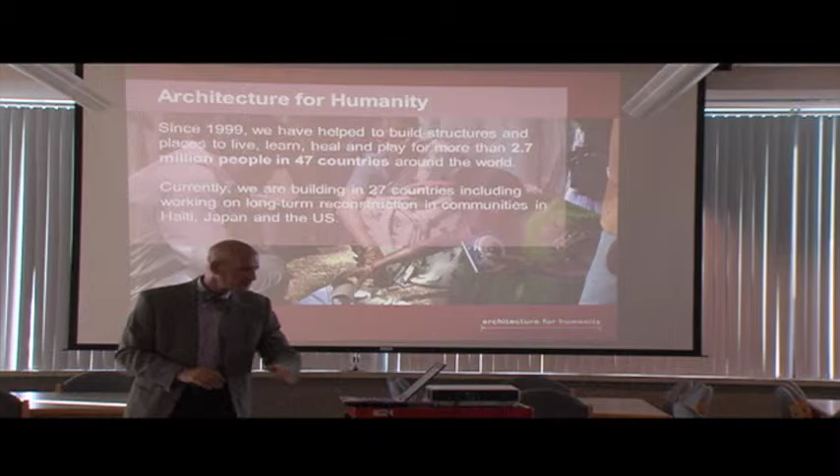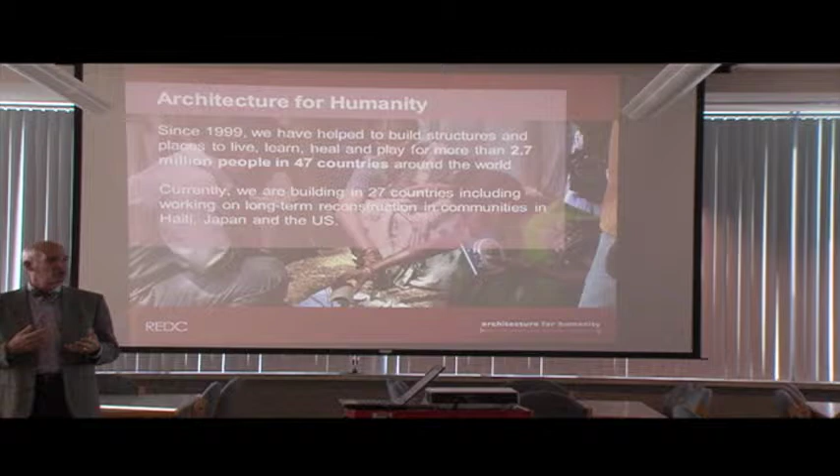A little about Architecture for Humanity: we are a 15-year-young organization using the power of design to better lives globally. Our network of field offices ranges from our headquarters in San Francisco to New York, Haiti, Bogota, Johannesburg, and Tokyo, and we have 56 chapters worldwide. The closest one is our friends in Newark - thank you, Tom, for joining us. We have a chapter in New York, one of our largest, a chapter in Philadelphia, and about 18 here in the United States, maybe a bit more. The rest are global: Europe, Asia, Africa, and so on.

One of our partners in this process is the Ocean County Long-Term Recovery Group. I'll invite Peter up here to talk a little about their organization. Peter?

Hi, my name is Pete Crawford. I'm from the Ocean County Long-Term Recovery Group, the Assistant Disaster Case Manager Coordinator. I wanted to come here today to speak about the process - what the DCMs, or Disaster Case Managers, do to help people get their unmet needs fulfilled in recovery from the storm.

The biggest part of our process is vetting. Once someone's been assigned a Disaster Case Manager, we go through a checklist and ask people for copies of personal information to ensure they're sustainable, that it's their primary home, and they were affected by Sandy. We do an initial assessment, like an application during an intake meeting, gathering information about where they were during the storm, what they've done so far, what they received from insurance companies and grants, to paint a picture of their unmet needs so we can come up with a disaster recovery plan.

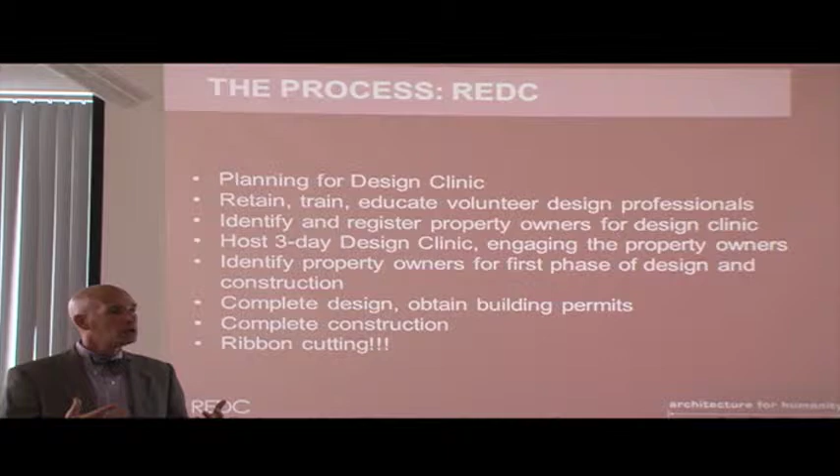We're in the process of gaining funding for future construction projects, and hopefully that'll be coming in not too short a while. Construction and obviously the ribbon cutting, which I think we talked about with our partners. People are going to be coming with little gift baskets and that's the event.

So what are we going to really be gaining out of this in terms of community goals? Well, it's to elevate the knowledge really of not just the homeowners, but of you folks to design smartly, and we'll get into what that means in a little bit.

The program goal is to serve a vulnerable population, seniors, disabled, veterans, low-income, single-income families, provide a means for those wanting to help with the recovery efforts to do so, develop a needs case, identify the most prominent recovery design issues for that particular neighborhood, and develop innovative design solutions.

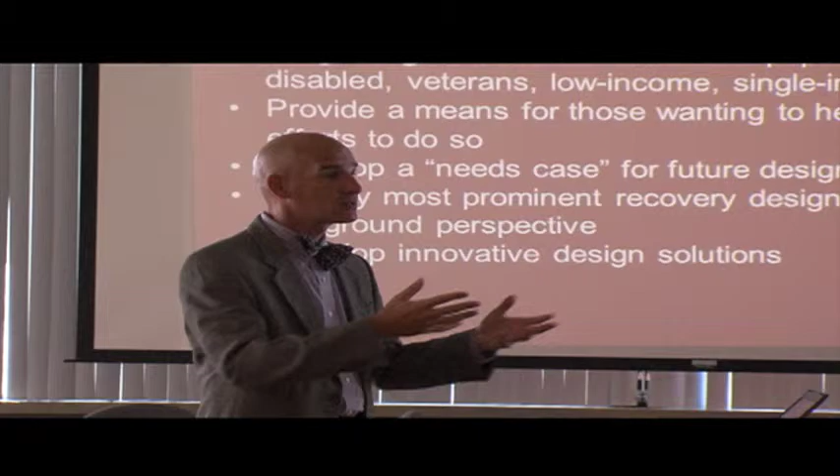So that's really where you guys and gals come in, the innovative design solutions. You're really going to be able to flex those design muscles in providing interesting and innovative design solutions for the community of Seaside Heights. And there's going to be a variety. Some, most I think, will be single-story bungalows, and there will be some multi-story facilities.

I know that OCLTRG has reached out to one of their colleagues at FEMA for the commercial side of it, so we may see some commercial clients coming in. It'll be an interesting pool of information.

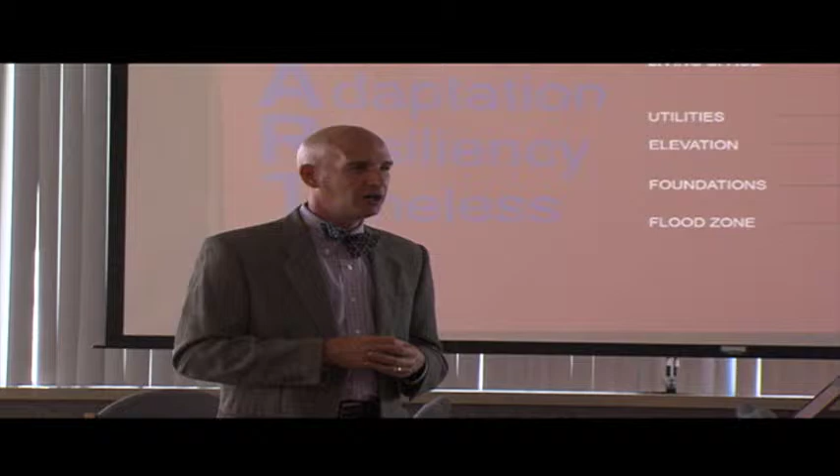So what does smart design mean? It's sustainable, it's mitigation, it's adaptation, it's resiliency, and it's timeless. A lot of people in our profession struggle with what sustainability means in terms of green buildings, and even more have a tough time identifying what resilience means. So at the end of the day, it really means designing a building smart.

Along with this, we want to talk a little bit about climate change, because it's not just about a storm right here, right now, but planning for the future. It's that timeless piece. We want to make sure that the buildings we are solving problems for are generational. It's not just a 5 or 10 year fix, it's a 40 or 50 year fix.

You hear people talking about climate change, sea level rise, and how do we deal with that? It's not just maybe 1 foot of freeboard, but it might be 2 or 3 feet of freeboard. We'll get into what freeboard means in a little bit.

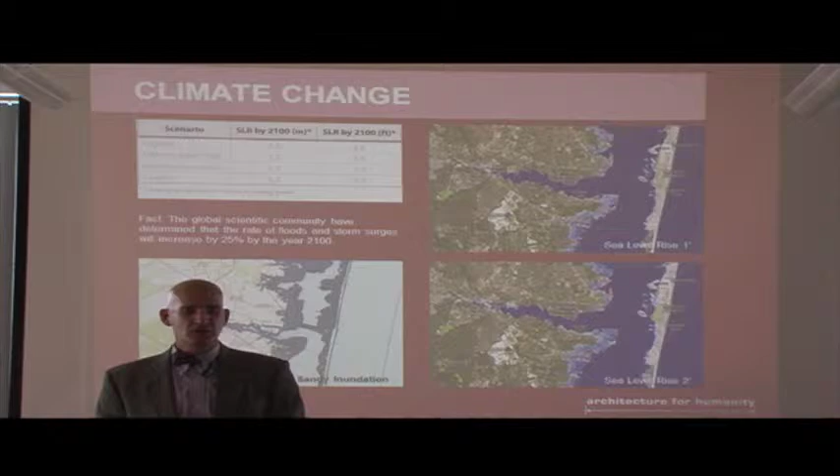The images on the screen right now, the lower left-hand one was the Sandy inundation of this particular region. Everything in blue was inundated by the storm surge from Sandy, and it goes in pretty far.

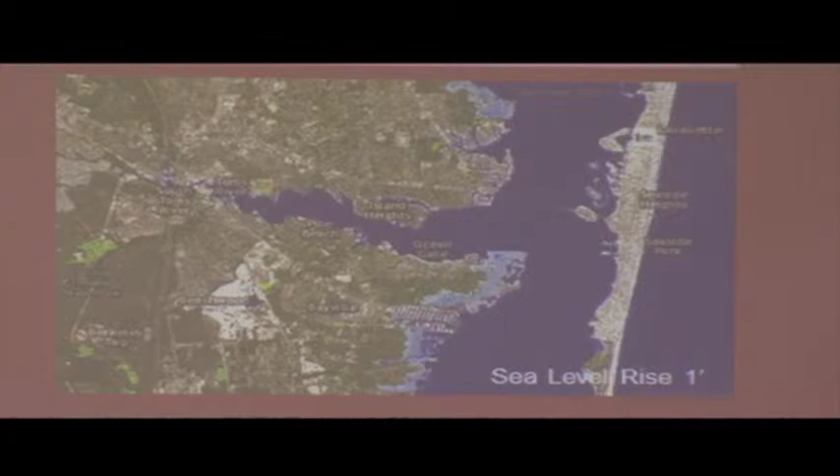If you look at the upper right with 1 foot of sea level rise, you can see the blue area is the effect. The lower right with 2 feet of sea level rise is an even greater effect. So how do we deal with that with our design solutions? That's something I challenge you folks to think about when talking to the clients and the design firm.

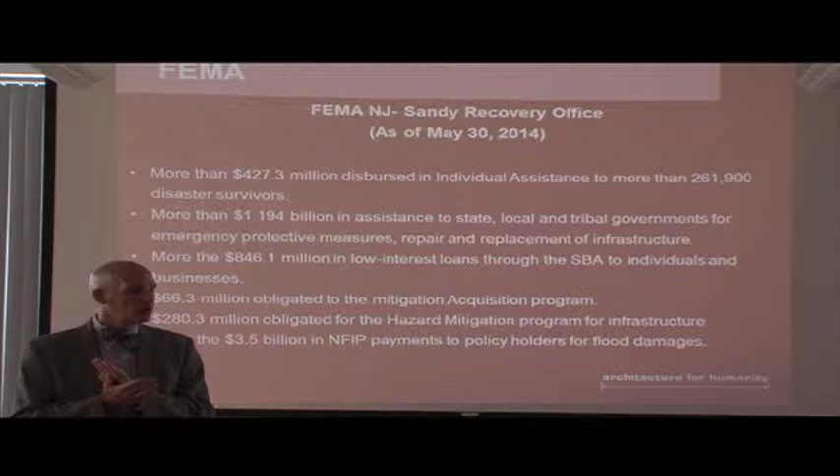Almost $1.2 billion in assistance to state and local governments. Another 280 million towards the hazard mitigation program for infrastructure. And we're not done by any stretch of the imagination. NFIP is the National Flood Insurance Program.

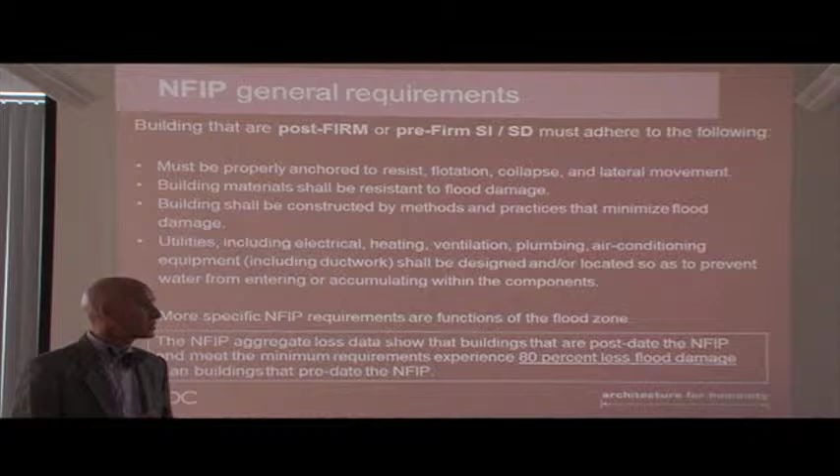One of the things we are going to be requesting, if not necessarily requiring - I think we're going to have a long conversation with our partners about the projects we take on - is if you build a residence, we reconstruct it, we're going to ask that you are sustainable and provide yourself with flood insurance. We don't want to have to come back a year, 2, 3, 5 years from now and worry about a project we've taken on that doesn't have any insurance. We want to make sure the building is sustainable, that the client can afford flood insurance and afford their building.

Just some quick facts about how the NFIP treated Sandy: authorized payments right away up to $30,000 for initial building repairs - think rapid repair program in New York City. A lot of that $30,000 went to roof repair, window and door replacement, infrastructure, boiler, water heater, and electrical upgrades.

I think, if I'm not mistaken, New Jersey just closed on the 1 year - Ken, correct me if I'm wrong. New Jersey closed the door on submission for that first year not too long ago. They basically closed everything now. I don't think there's any other grant right now. Correct, unless they change it and then reopen. Correct, thank you.

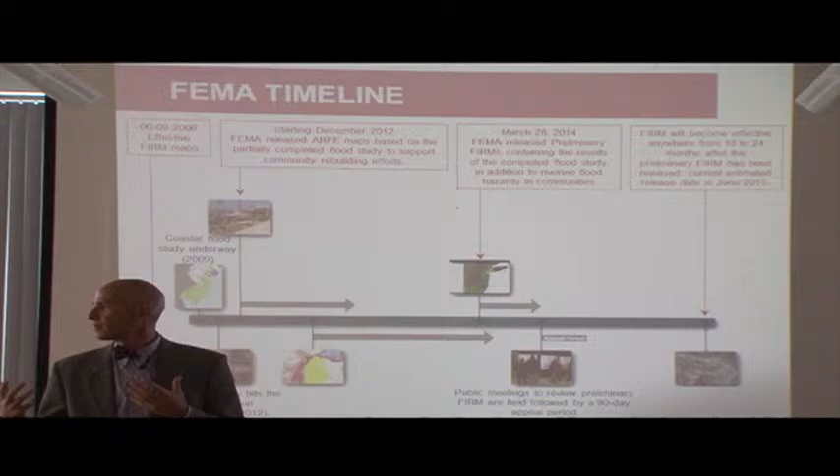So FEMA timeline on some firm maps. FIRM is how NFIP rates properties within a flood zone. The last preliminary flood insurance rate map was issued in March of 2014, so a few months ago, and they're looking at closing the door on that and making them final and official around this time next year.

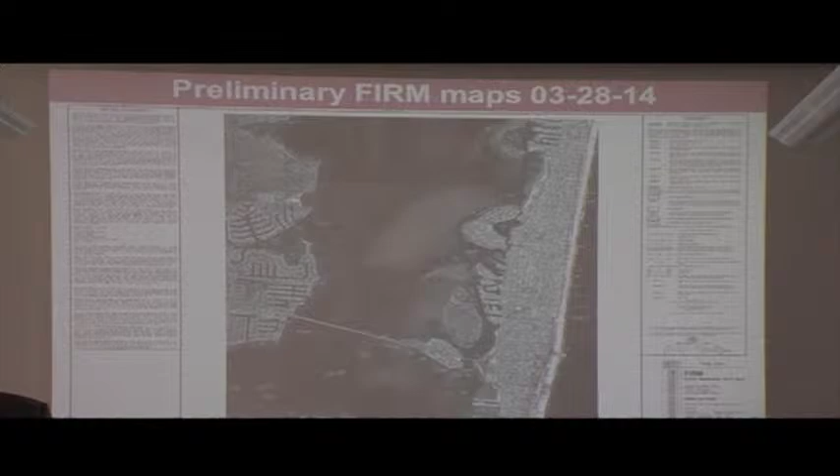And this is what a preliminary firm map looks like. You can find this on Region 2 Coastal through FEMA. Might be a little tough to see in the slide, but this is Seaside Heights, Seaside Park, and Lavallette to the north, with Route 37 Causeway cutting through the middle of that slide.

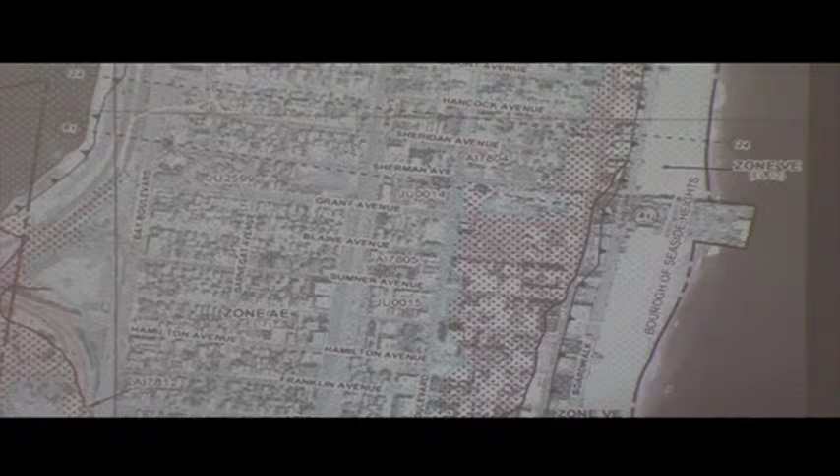Close up, Seaside Heights is broken up into a few zones. V is right along the beach, then X, then AE, which is predominantly in the middle, and then another X zone right by the Route 37 interchange.

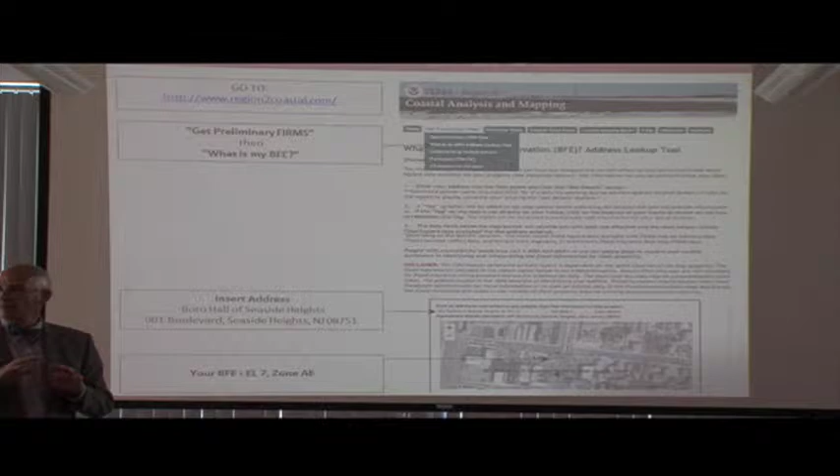So how do you find your BFE? You go to the region2coastal.com website, and click Get Preliminary Firm, a drop-down menu. Just a sidebar, all of this will be available to you at the design clinic. Each team will have a laptop with access to all of this information. Make it nice and simple.

So a client comes up to you and says, I don't know what my BFE is. You can plug in their address. In this case, we plugged in Borough Hall at Seaside Heights, and up comes the information. At the bottom, the BFE is elevation 7, zone AE.

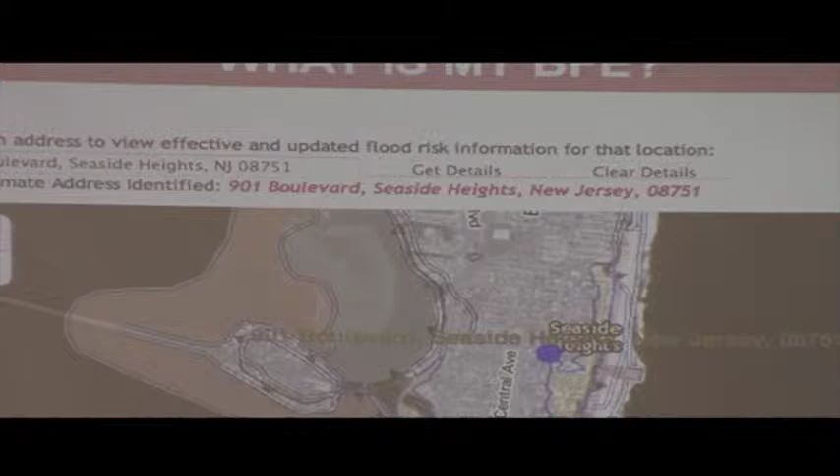So you can go through and get further details. This is a little bit more of a detailed map of the various areas.

Again, firm maps are broken into a number of areas. V, which is tidal, usually right on the ocean. Coastal Zone A, a little bit more inboard. AE, farther in, and then X is limited.

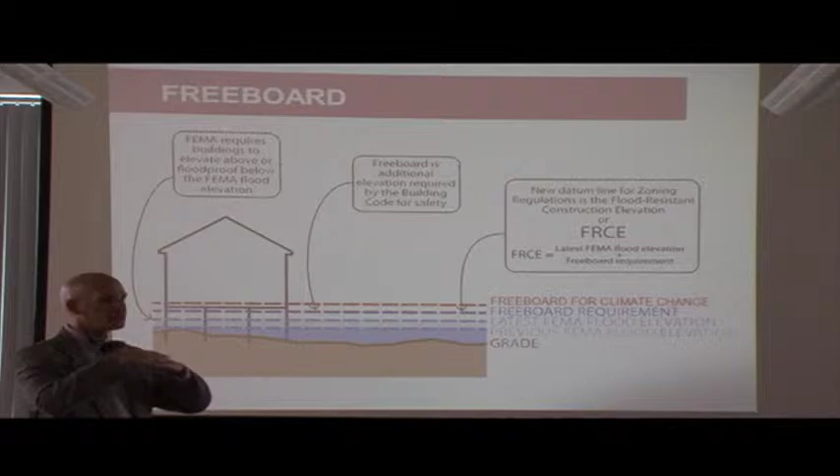So we talked a little bit about freeboard. That freeboard area is, you have a base flood elevation, which is what is recommended for your bottom living area. And then you have a design flood elevation, which is usually base flood plus your freeboard. Sometimes it's 1 foot, sometimes it's 3 feet. In Seaside Heights, it's recommended as 1, although with climate change we are recommending anywhere from 3 to 5, depending on the neighborhood.

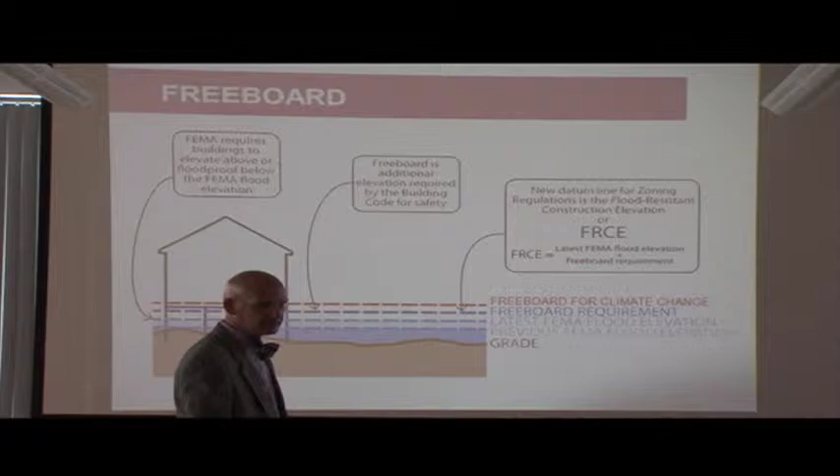Just a couple of glossary items. The National Flood Insurance Program, NFIP, talked about the special flood hazard areas, again V, A, AE, and X. We talked a little bit about base flood elevation, design flood elevation, and that term freeboard.

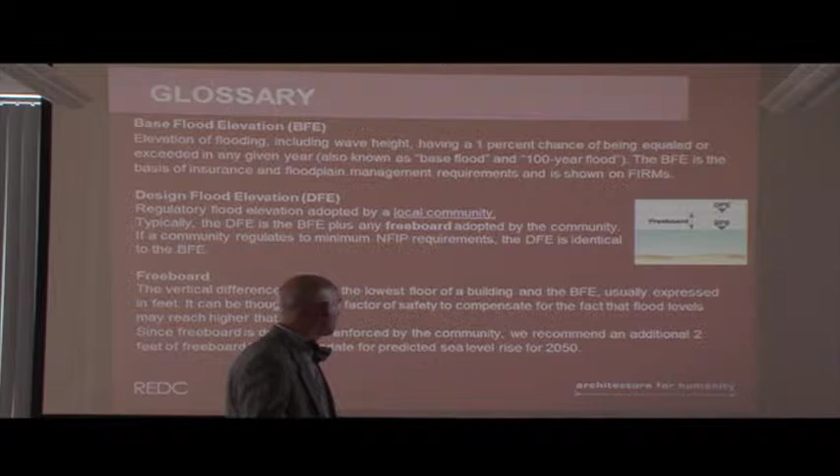Again, at the bottom, right now we're recommending an additional 2 feet. So it's 1 foot right now, plus an additional 2 feet within Seaside Heights, which would be 3 feet in total, to accommodate predicted sea level rises for 2050, which is still all within our generation.

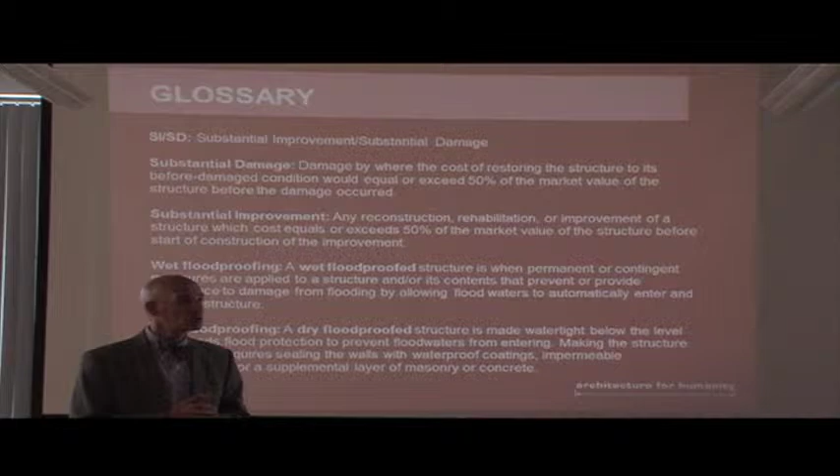SISD, substantial improvement, substantial damage. Anything north of 50% damaged of a building would be considered substantial damage, which means you need to make a substantial improvement, which means you need to follow the current New Jersey State Building Code. Anything less than 50% is considered a rehabilitation, although we are encouraging even those property owners with less than substantial damage to take serious consideration of the current building code.

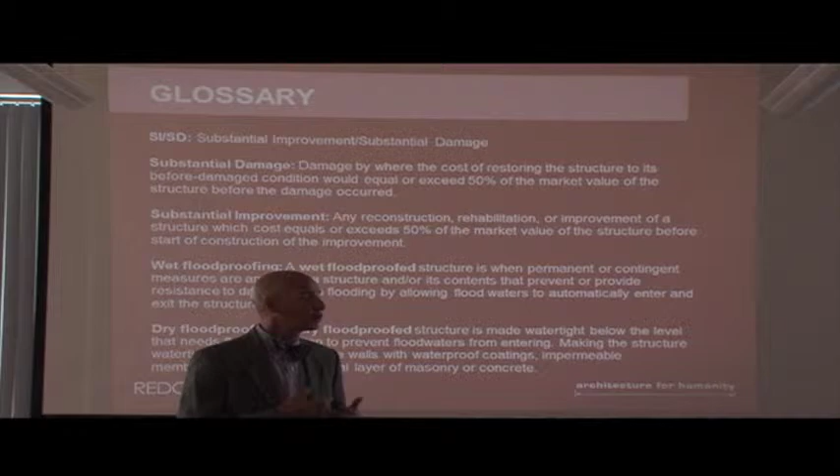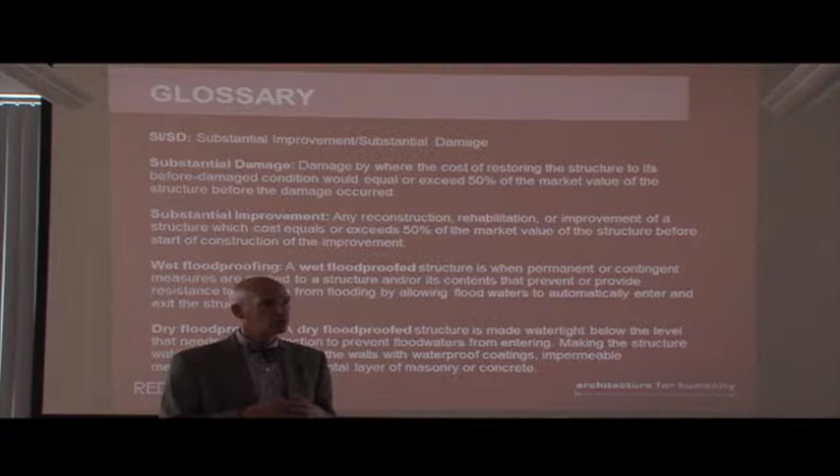Wet floodproofing and dry floodproofing are two pretty important terms to understand. Wet floodproofing is predominantly used for residential structures, which allows floodwaters to pass underneath or through the building, and we'll get into a couple of diagrams of what that looks like. Dry floodproofing is kind of the opposite, it prevents water from getting into the building. We'll get into some slides about that. Dry floodproofing is predominantly used for commercial or mixed-use structures, and I'll explain why.

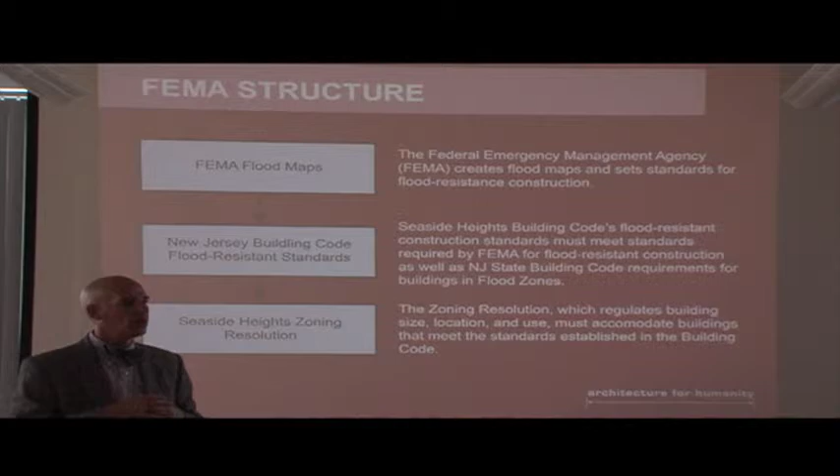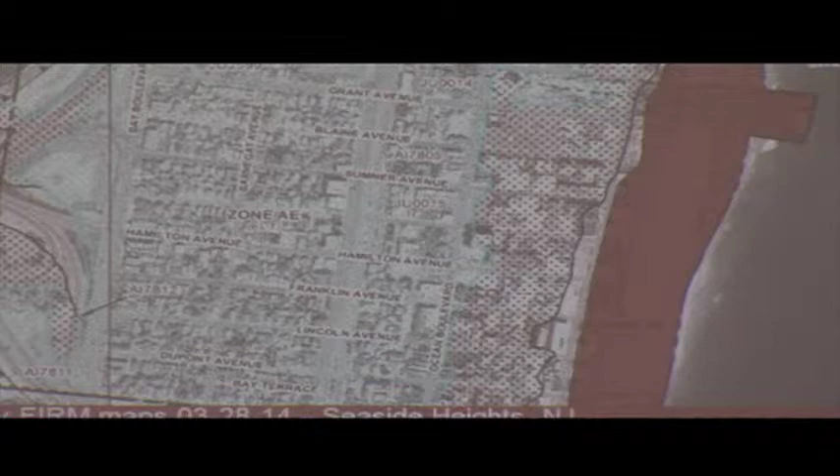So, Seaside Heights Zone V, as you can see in the dark color on the slide, is predominantly the beach, the boardwalk. Ken, remind me, does that go inboard to that first row of commercial spaces? No. Okay, thank you. That would be Zone X, the first commercial street.

So within Zone V, pre-FIRM map, pre-Sandy if you will, these were the requirements for rehabilitation, a lateral addition, a vertical addition, or a foundation repair. Nowadays, in coastal Zone V, everything must comply with the current building code. Period. Straight up. Do not pass go, do not collect $200.

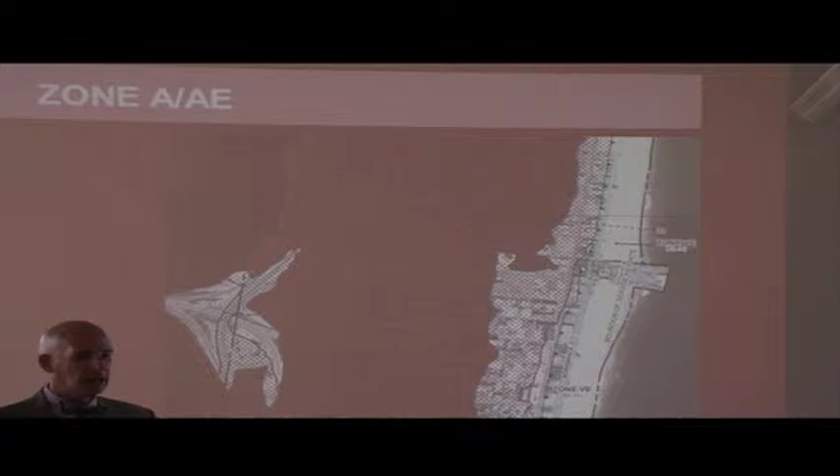Zone A, as you can see, most of Seaside Heights is Zone A. Within Zone A, the design, construction, and lowest floor elevation must meet at or above the BFE. Again, we're going to be talking about coastal mitigation with climate change: that's DFE plus another 2, or BFE plus 3.

And then Zone X, again, interchange around 37, and then the predominant zone of commercial spaces running along... I'm sorry, I can't remember the name of that street. Ocean Terrace. Ocean Terrace, thank you.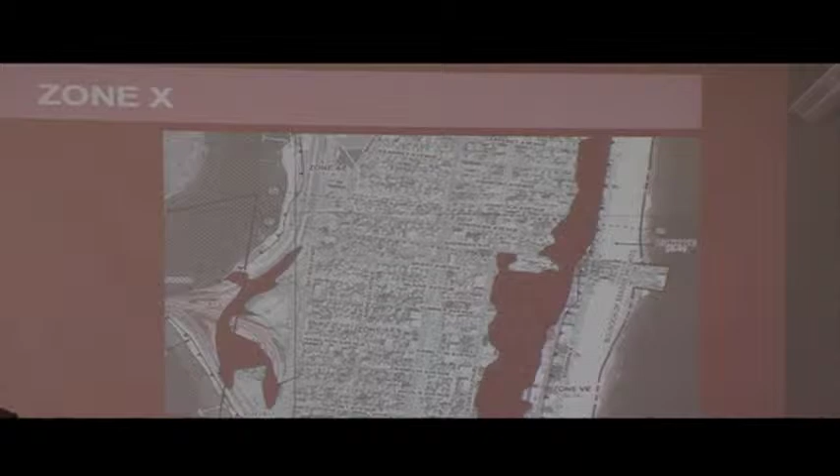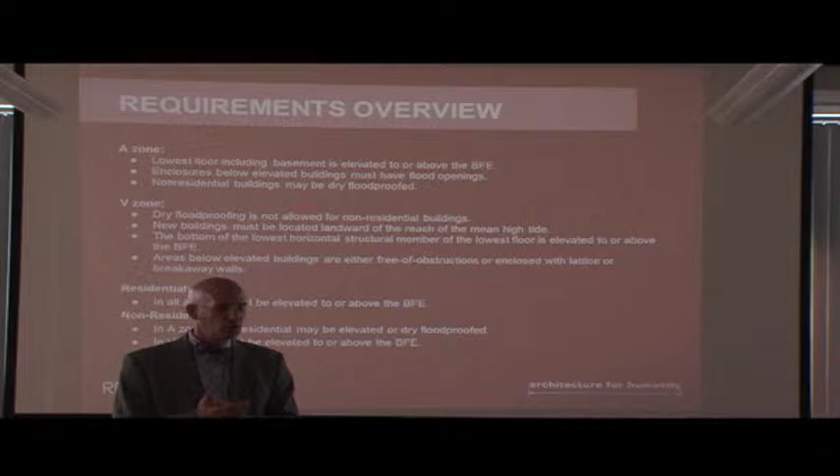Just a quick requirements overview. Zone A: lowest floor, including the basement, is elevated to the BFE. Enclosures below that building must have flood openings. I'll show you some examples of what that looks like in a little bit. Non-residential buildings may be dry floodproofed. In Zone V, dry floodproofing is not allowed for non-residential buildings. New buildings must be located landward of the reach of the mean high tide. Residential in all zones must be elevated above BFE.

So what does that look like for a commercial building?

If you are elevated or wet flood-proof, the image to the left shows that, which allows the water to pass through. Ken, do we have any buildings in Seaside Heights that are commercial and are elevated? No, not anything off of it.

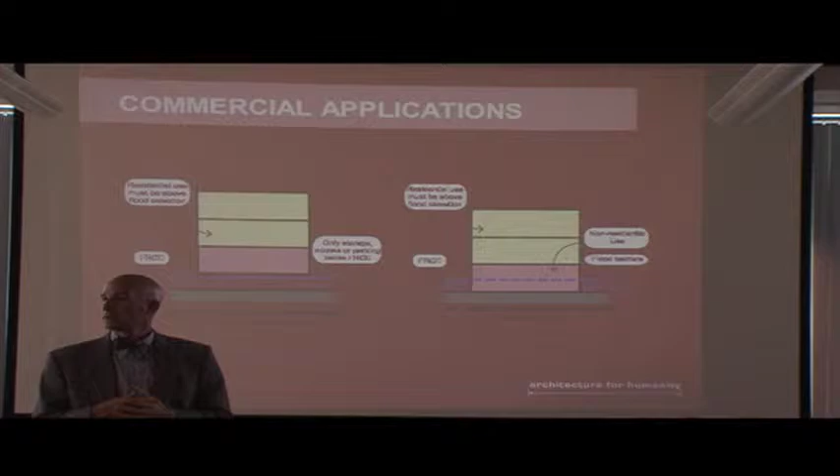So in most cases, if we see a commercial client coming in, what we're probably going to be suggesting is either, if they can afford it, to wet floodproof or dry floodproof to above the BFE, or BFE plus 3 if we're talking about climate change. In some cases that could be the head height of the door, in other cases that could be waist height. I think it's really going to be dependent upon where that design flood elevation is running.

So what does that look like in sketching terms? Well, the image on the right kind of shows that. It's a bracket around that door or around that storefront window with a flood mitigation louver at it.

It is deployed in the event of an event, usually by a human. I haven't seen too many automatic protection systems, but they do exist. And then when the event subsides, those come out, and you have access.

Now the kicker on this is going to be maintaining appropriate egress out of that space in the event someone's still in that commercial space with the floodgates deployed. So it's something that we'll need to wrap our arms around and come up with a reasonable design solution.

Most building codes have structural occupancy categories 1, 2, 3, 4. The majority of the ones that you will be dealing with fall under Category 2. Category 1 are low hazards to human life, such as agricultural or storage buildings, temporary structures, that sort of thing. Category 3s are substantial hazard to human life, such as schools, healthcare facilities, buildings with an occupancy of 300 or greater.

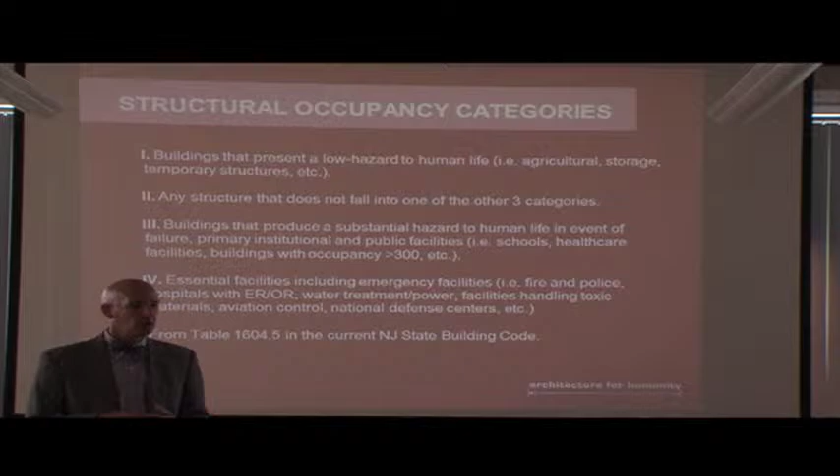Lastly, Category 4 are essential facilities, including emergency facilities, fire and police, hospitals with an ER or OR, water treatment power plants, toxic material handling facilities, aviation control, national defense centers. Again, we're going to be dealing predominantly with structural occupancy category 2. This categorization can be found throughout the New Jersey State Building Code.

Section 16, structural, has this predominantly. This can be found from the ICC as well. So this is coastal high hazard areas, Zone A, coastal Zone V, and coastal area Zone A.

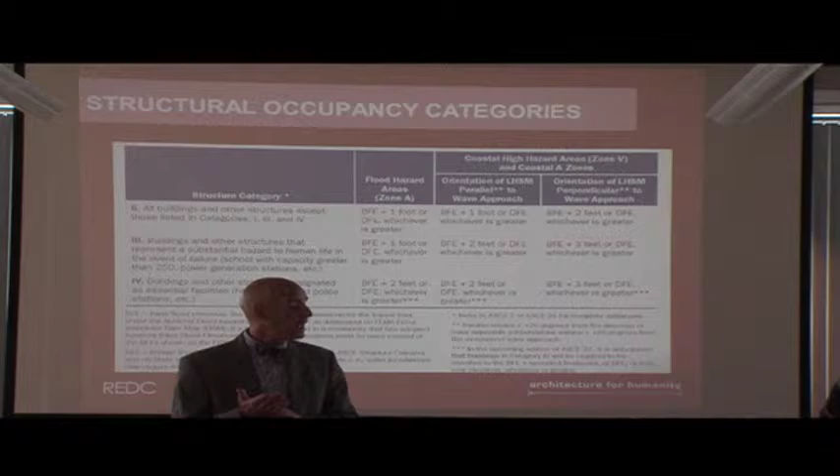So all buildings and other structures except those listed in categories 1, 3, and 4. You can see in the chart flood zone area A is BFE plus 1 foot, or the DFE, whichever is greater. Again, we're talking about BFE plus 3 when we're talking about climate change.

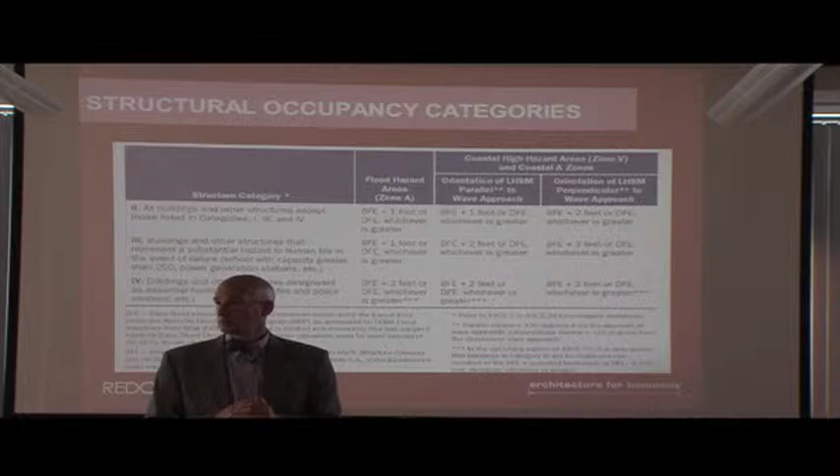Orientation of the structure, if it's parallel, is BFE plus 1 foot, or DFE. And orientation perpendicular is BFE plus 2 feet. So a little bit of a difference there.

Commercial zone V, again, the chart straight from the ICC. This is section 1604 of the New York City Building Code, but it's not too different in New Jersey. It's the same criteria, essentially.

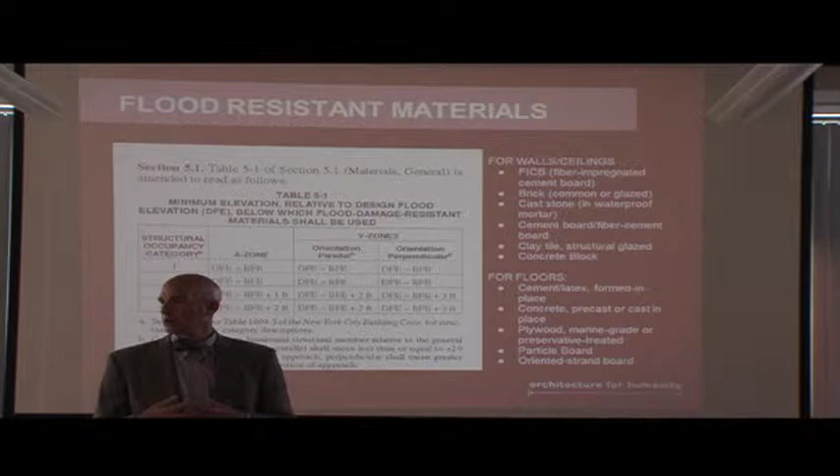Flood-resistant materials, we want to make sure that our projects that we are proposing are resistant. They are sustainable, and they are, again, timeless. So we want to make sure that whatever materials we are using will stand up to the test of time. We are not going to be doing something made out of asbestos, for obvious reasons. We are going to be using substantial materials that meet the building code.

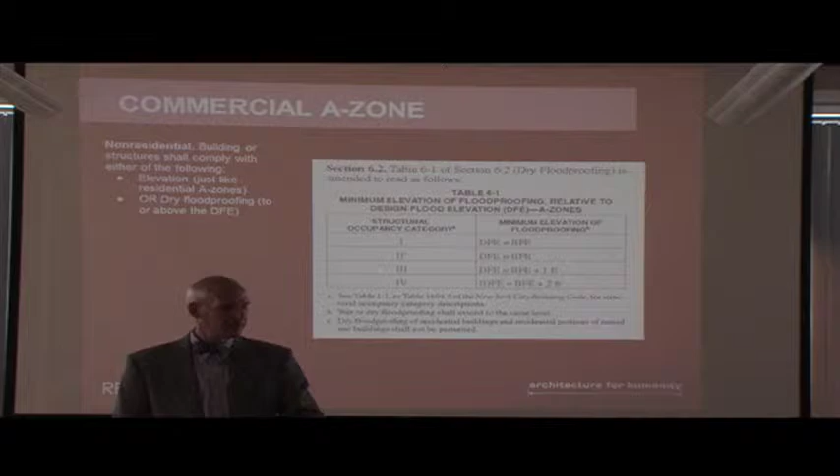We're going to be looking at commercial A zones. In a commercial A zone, you have to dry flood-proof your building up to the BFE.

Some are going to ask, why can't I elevate my commercial building? You must elevate your commercial building in a V zone, but not in an A zone.

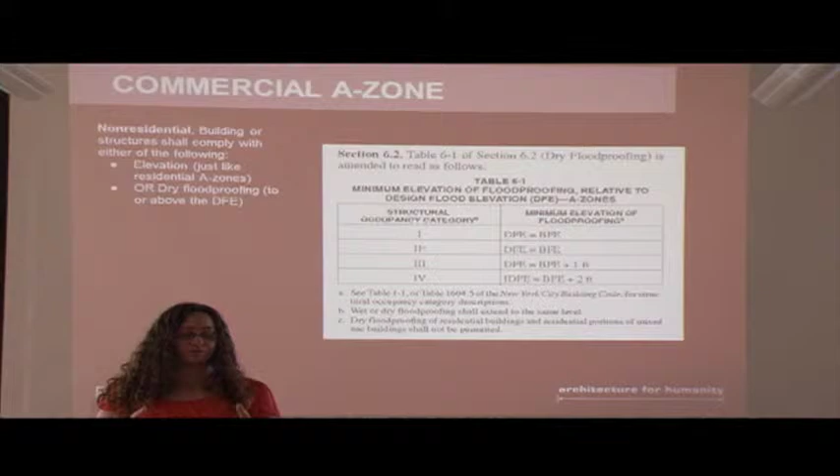If we remember back to the slides showing the flood zones for Seaside Heights, a majority of the community falls within that A zone. So there will be some commercial structures in the center of the community that fall under this category that might come in and be your client. You don't need to elevate. You need to dry flood-proof up to that BFE line.

It needs to be considered for breakaway walls if required, and there are other aspects. For example, instead of just having constant breakaway walls, you can put in some plantings to accommodate for that street scene, because commercial structures interact with the sidewalk around them.

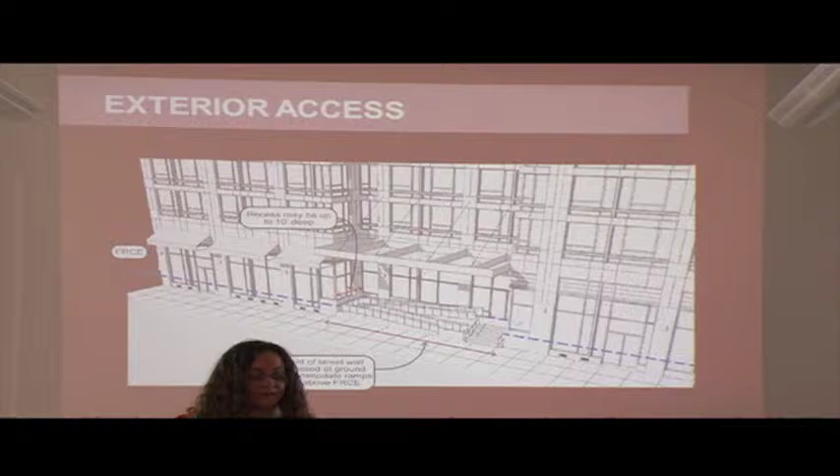This condition is going to be rare in Seaside Heights. However, if you do come across a commercial structure that wants to elevate their interior floor and has to accommodate for how to get into that new elevation, you can either place the ramp on the outside, assuming the building envelope and site allow for it with the setbacks, or you can place the elevated ramp and access on the interior.

So there are certain things—when you look inside this diagram, you can see the finished floor is at that flood-resistant construction elevation, and the access to get into it is just on the inside of the building, keeping the aesthetic the same on the street.

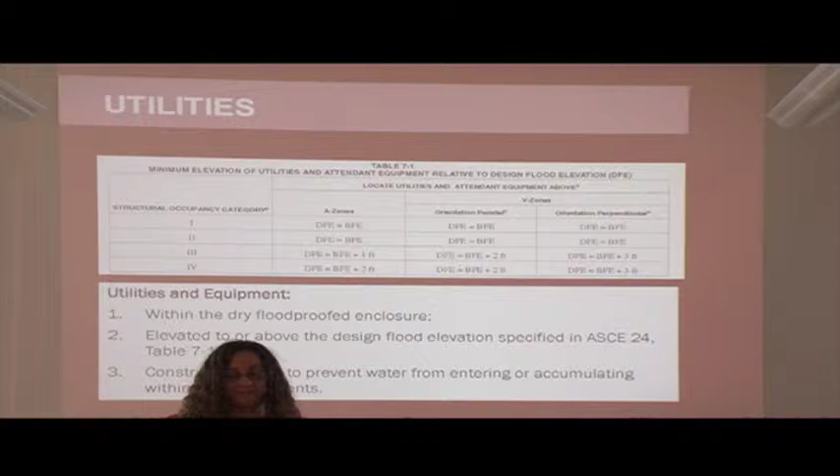Utilities within a dry flood-proof enclosure should be protected. First off, if your utilities are below the BFE and you are a commercial structure, dry flood-proof them. If your utilities are in a residential structure and below the BFE, elevate them. The point is your utilities have to be protected. You cannot keep your utilities and mechanical equipment below the base flood elevation. So you have to either bring them up and keep them protected, or enclose and encapsulate them and keep them protected.

Mixed-use buildings—this condition again I don't believe is going to be that prevalent in Seaside Heights, but you might run across a few. Most importantly, mixed-use buildings are treated the way commercial structures are treated. So a mixed-use building in an A zone or AE zone does not necessarily need to be elevated, but again, you need to dry flood-proof up to that BFE line.

If it's mixed use and has that commercial aspect on the first floor, that commercial aspect has several approaches. If your client wants to keep the commercial aspect, you can talk about dry floodproofing and floodgates, or elevating slightly. If they're only off by a marginal number to hit the BFE, you can talk about elevating the height of the floor, assuming the ceiling height provides for it.

If the client decides to abandon the commercial on the first floor, they can open up the walls and turn it into parking—open it all up, strengthen the structure, and provide parking, assuming you reinforce the underside of the structure. One thing a lot of people forget is that cars tend to float, and they're going to damage the underside of the structure.

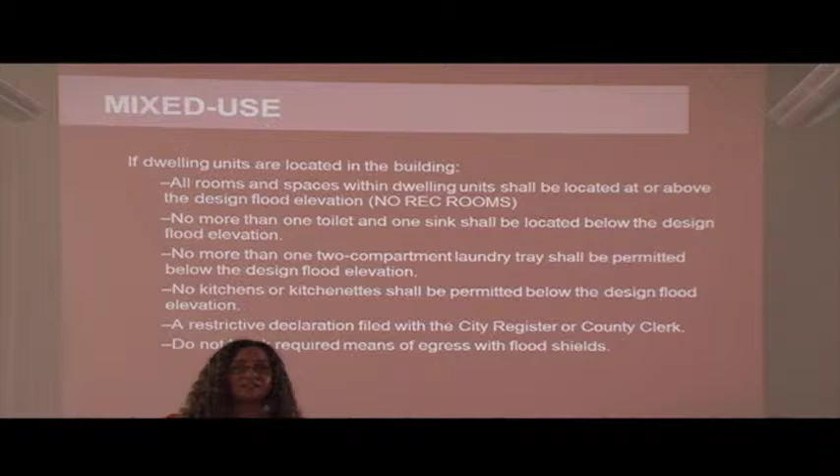However, one important thing to note is that this is an existing structure you're talking about adding levels onto. So always recommend that they have a structural engineer do an evaluation on the existing property, because it might not be strong enough to take on those new loads.

Do you want to jump back into residential? Better now, thank you. Okay, sorry about that, frog in my throat.

Going back to the two classifications of reconstruction for residential properties, anything less than 50% is considered a rehabilitation and falls into the New Jersey State Rehabilitation Code. Anything north of that, we're talking about substantial damage and must meet the current New Jersey State Building Code, which is essentially elevation.

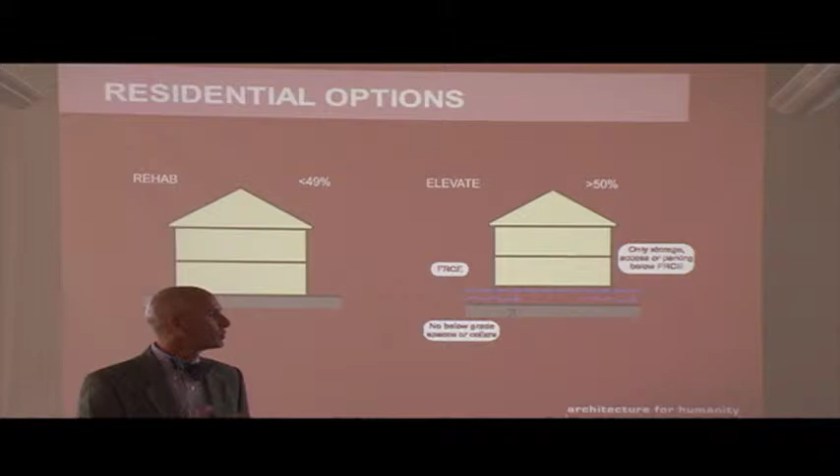Yes sir? Okay, for questions, absolutely. You have a commercial building with residences above it. So it's mixed use. Yep. Size of the first floor.

That would not be substantially damaged. The entire building - where do you take each of the uses separately? That's a great question. You can keep it all under one block, so it's a total use on one property. You guys can set it up any way you want. That's how we look at it. I'm trying to - we take the whole property.

You're correct, the whole thing, not just one part. So presumably it'd be a rehabilitation at that point, because it has to be under 50%. It all depends what was in that first floor, the cost of that reconditioning. So you're taking the whole building? I take the whole building. Right.

That cutoff is for the whole value of the building. So in a mixed-use structure, you've got zero damage on the upper floors. It's worth $1 million, let's say, and it's got zero damage on the upper 3 floors, but it's got $550,000 of damage on the first floor. Guess what? You're 55% damaged. Which I think is how FEMA looks at it as well - it's the value of the property, not the value of the pieces, parts of it.

So just some quick diagrams of what floodproofing would look like. In this particular case, the walls are breakaway. The insulation is above that gap. There is a clear gap within the wall, so the bottom half of that wall can be taken off pretty easily, but the upper half still meets the energy code.

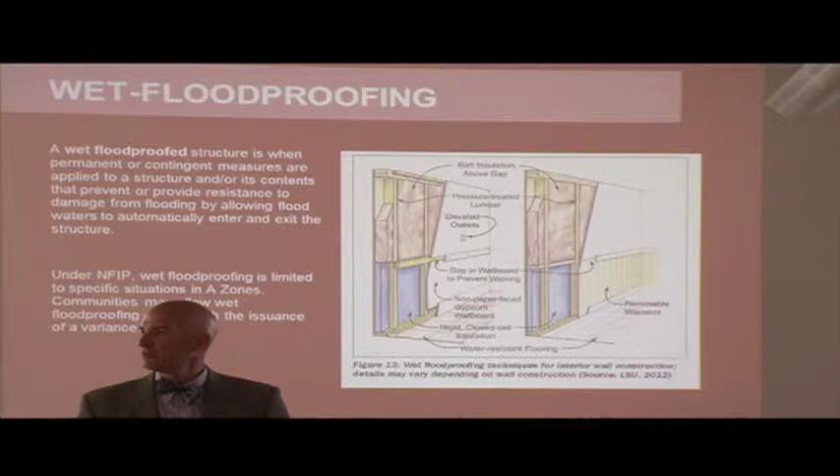However, this is limited to A, or AE, not so much in the V, right? Because in the V, bringing it up...

Obviously, the building must be properly anchored - unless we're actually making a houseboat, and then that's okay. That's a whole different thing. But 99.9% of the properties that we're talking about here in Seaside Heights are affixed to terra firma.

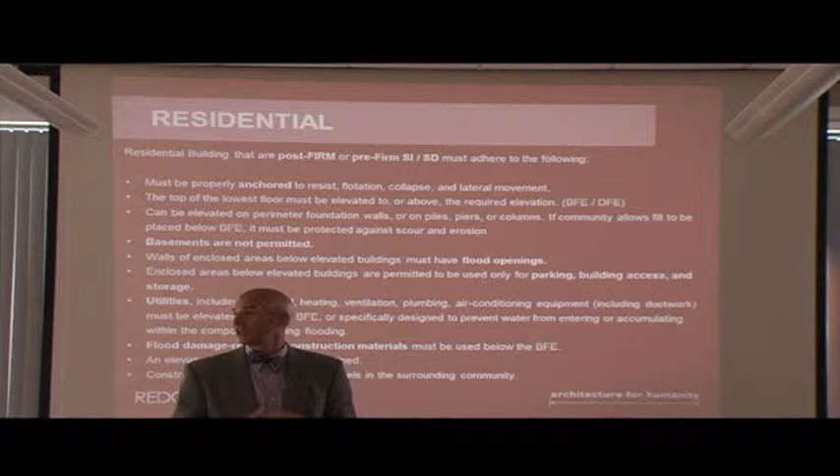The top of the lowest floor must be elevated to or above the required design flood elevation. So again, BFE plus 1 or BFE plus 3.

Basements are not permitted. And we actually walked by a couple of structures last week that had basements, and we were kind of scratching our heads about how did they fare. These were Bayside. Interesting - we'll talk offline about that.

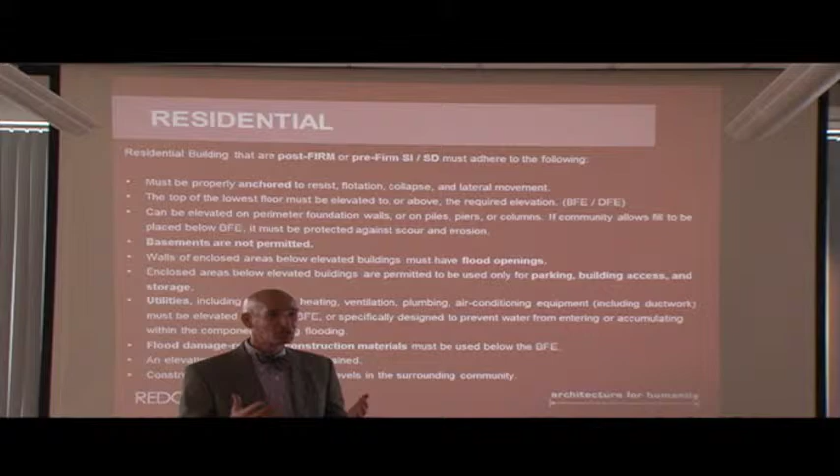Construction cannot increase flood levels in the surrounding community. So when we're talking about residential land, we don't want the neighbor to be affected negatively by what you're doing on your properties.

Communities may allow wet floodproofing without variance. This comes directly from FEMA. Enclosed areas that are below the BFE are solely used for parking, building access, or limited storage must be designed to allow for the automatic entry and exit of floodwaters. So on and so forth.

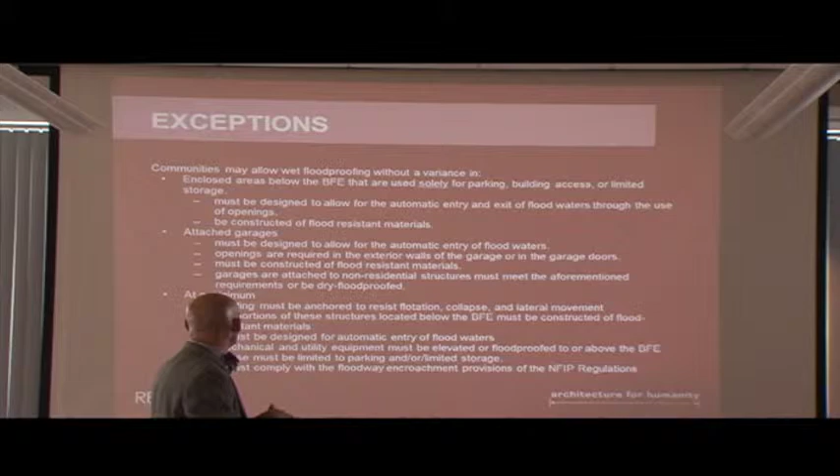Garages must allow for the automatic entry of floodwaters. Openings required in the exterior walls of the garage or the garage doors must be constructed with flood-resistant materials. I see a lot of brick in Seaside Heights' future. Yes.

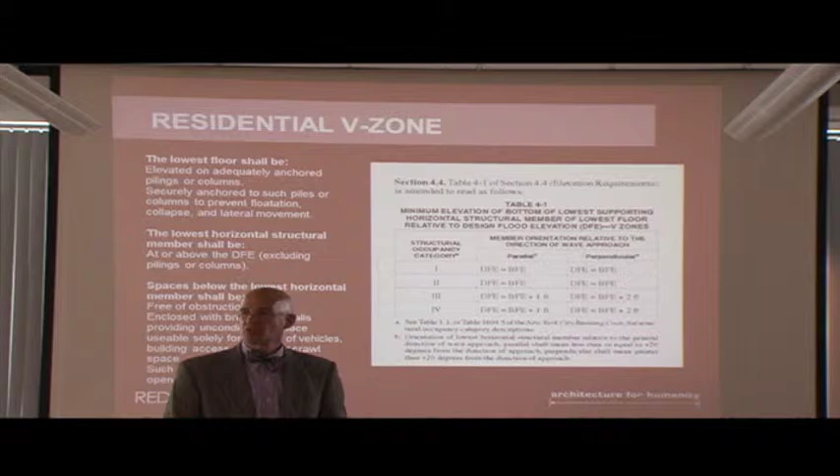Residential in a V zone, again, this table is taken right from the New Jersey State Building Code. But again, you can see category 2 for parallel, it's the DFE equals the BFE. Perpendicular is the same.

Ron? Yep, I'm going to ask a quick question. You may. You said it's in the New Jersey code - the table up there says it's the New York City building code. New Jersey has a nasty habit of deleting sections out of code, I know a lot of which are the flood resistant construction ones. Is this in New Jersey code or is it?

This is within chapter 16, which is structural. So yeah, it's the same table. Conveniently, it's from the ICC, so pick your jurisdiction: Minnesota, Massachusetts, New Jersey. New Jersey goes in and manually says we do not adopt this section, and you see that continuously throughout. It still exists - in New York, it's Appendix G. New Jersey has flood resistance provisions but actually says they didn't adopt it.

I'm sure in a V zone, if you're not substantially damaged, can you rebuild as is? We don't have those issues now - everything in V zones, everything we built, in Seaside Heights most everything that was substantially damaged in the zone has been rebuilt and elevated, with eliminated basements or it wasn't substantially damaged that we had.

Do you have any residents in the V zone? Most of what you'll experience in Seaside Heights that's in the V zone is either boardwalk or commercial, and the boardwalk is above the BFE - all rebuilt. The majority of what you'll be working on is going to be in the A zone, maybe a little in the X. There's very little damage to the X, except for the north end.

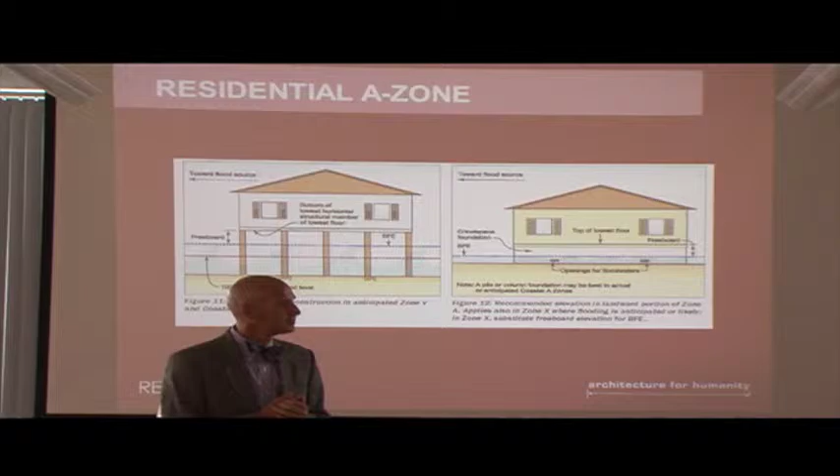If you don't elevate it, this is the image on the right - a crawl space with flood vents within that foundation wall. You will come across this pretty frequently, I would say. So what you may see now when you drive around is either a little window with a window well or a lot of nothing. What we would encourage is eliminating the windows and changing them out for a true flood vent. There's a section in the FEMA code, going back several years, that allowed you to design the foundation walls to stand out, so you did not have to put the flood vents in.

I am familiar with that - I believe that is still on the books, but you are limited to a certain percentage of perimeter of wall, and I want to say it's 50%. It is 50%, yeah. So if you think of a box, the house as the box, 50% of that exterior foundation wall can be a solid wall, where the balance of it needs to be free flow. So however you want to shake that out, but you can't build it as a structural wall that will hold the water.

No, because that goes back to the earlier comment, preventing water from diverting and potentially damaging a neighbor. You need to provide flood vents. The flood vents just equalize the pressure - that has nothing to do with the water going around. The way FEMA looks at it is the water's flowing through the structure and not stopping it. If you do take the option to make 50% of your walls regular standard construction, the remaining 50% of the perimeter actually has to be open and free clear space or breakaway, so lattice or green screens or something.

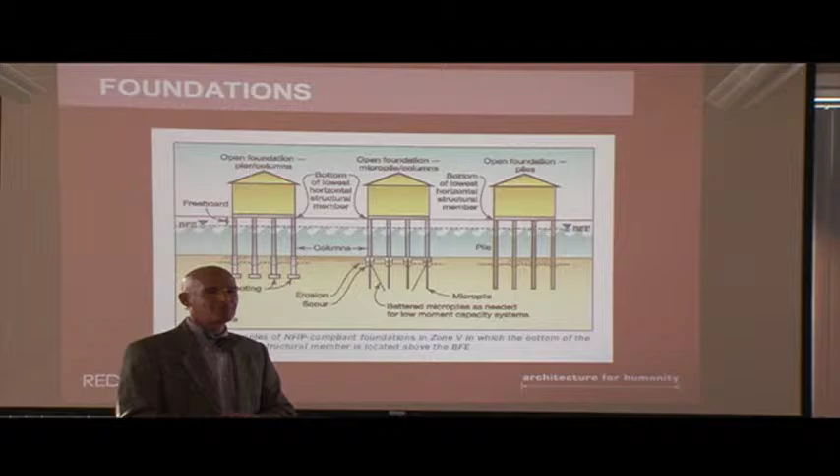Is there a preferred version of this, or is it come as you are, come up with dough and you can go any way you want? Just as long as that first floor is at the DFE. The cheapest way I've seen so far, they're coming in on piles. Yep, mostly piles.

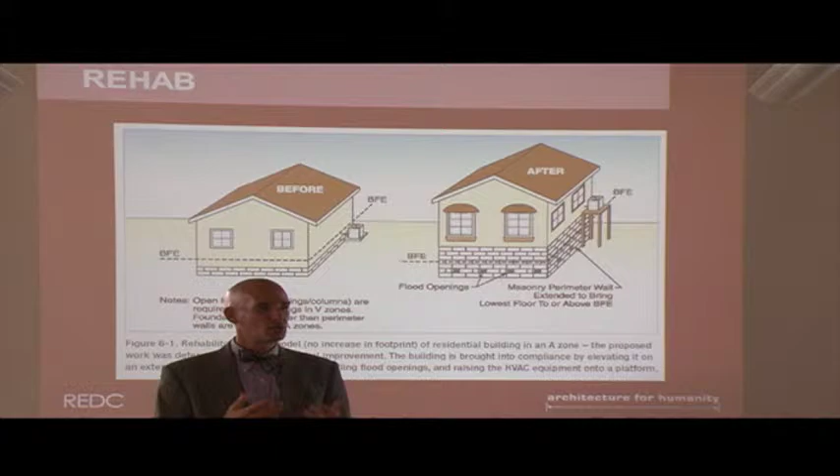Rehabbing, again, before is on the left. We have a base flood elevation. We want to elevate that, or suggest an elevation, or suggest that we pump in some flood vents just to help mitigate that pressure a little bit. In a number of neighborhoods in New York, we have a lot of hydrostatic pressure because the place was built on a swamp. In other cases, it's just the pressure coming in. So we want to make sure we're providing that information to the clientele so they can make the most appropriate decision.

Just an example of a location in an A zone. Pre-Sandy, the living area was on the first floor, then it got flooded out, and we want to make the recommendation that you're going to go to the slide on the right. So you're going to take that living space, take all your mechanical space, and put it up, and then the first floor, what used to be the first floor, will be unoccupied - storage, parking, access to that first floor, and so forth.

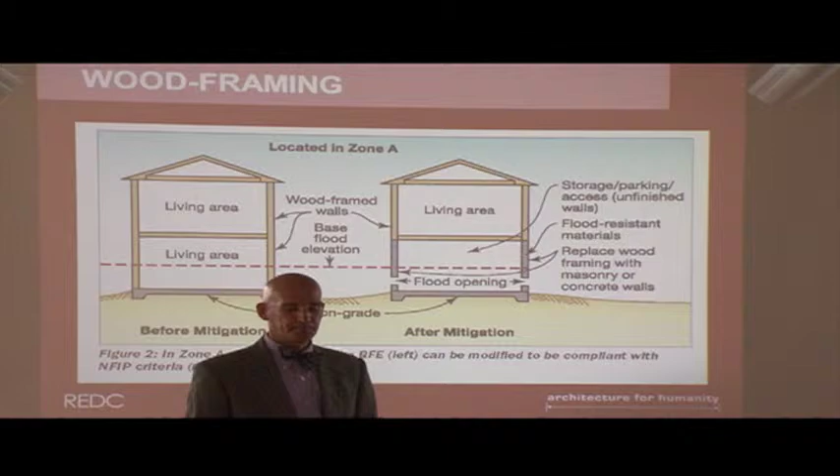Again, just some typical foundations. We're not going to see too many basement constructions. We'll have a fair amount of crawl space, possibly slab on grade, possibly piers - probably more likely the crawl space.

I don't know about you professionals out there, but putting a building on fill in any condition, not so much. So we're not going to suggest that. Although in other locations around the country you can, not so much here.

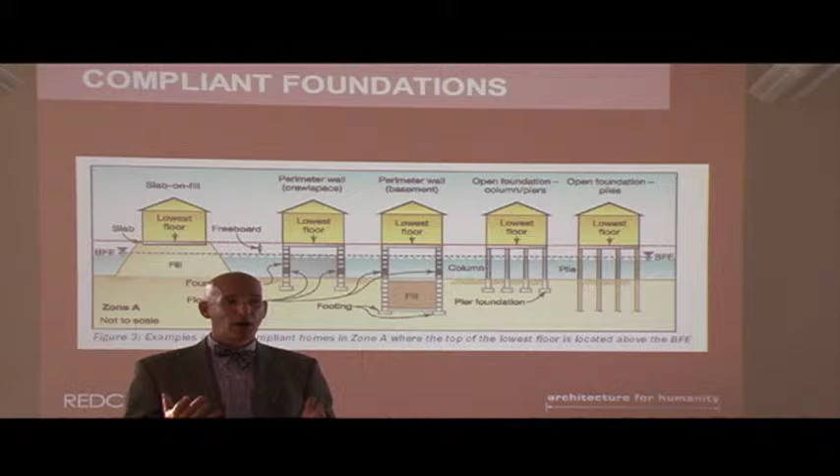The other four options are certainly valid, unless you want to do the whole town. Not really in our budget right now. That's really a great approach to climate change. Elevate just everybody - pick it all up, man. I said that to the mayor the first day. I was like, on Herring Avenue, you get out. You had to try - A for effort, right?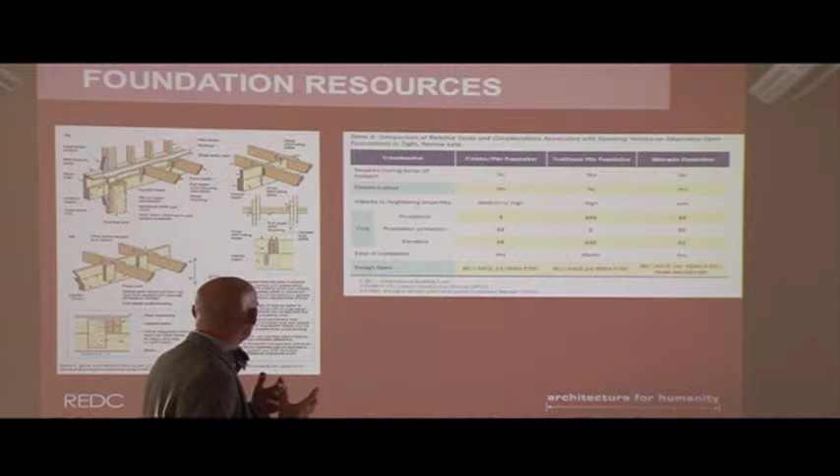Just a couple of diagrams about foundation clips attaching the building to a foundation. Simpson's making a killing, or their like-minded competitors are making a killing. The text is a little small to read, but once we send this around to you folks, you'll be able to read it in greater detail. Big expense, yep, but definitely worth it.

Pile design - obviously you're going to engage with a client who's going to say, well, what about piles? Can I put my house on piles? Yes, you can, but we want to make sure we say things like, well, we need a structural engineer, we need a geotechnical engineer, so that we understand how many piles, size, depth, and so forth.

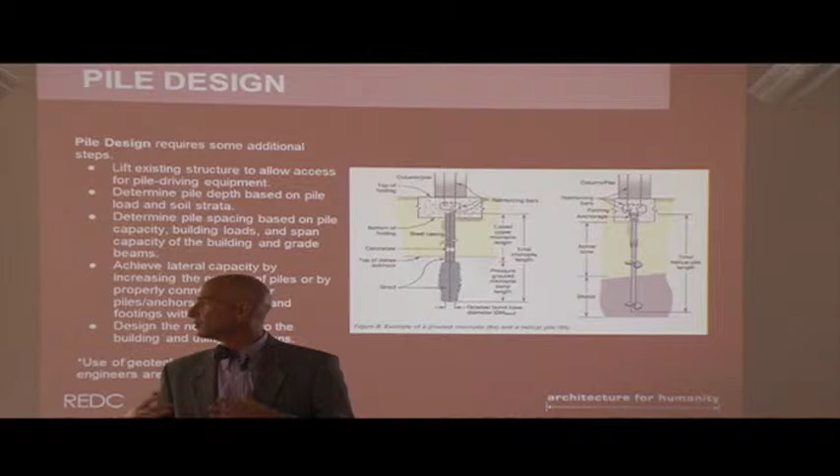Good question for Seaside - what's the ground here? Do you have a lot of peat? More than we thought. We thought we were basically all sand, and other architects and engineers who hadn't been working in the area came out and tested right next door. What other engineers were saying wasn't exactly what it turned out to be.

Lowest floor elevations in residential, again, DFE straight up - do not pass go, do not collect $100. It's going to make your life a heck of a lot easier when you make that case to the client coming in, whether it's at the design clinic or in the future. Just say DFE, make it nice and simple.

And then you can explain to them the process of elevating. You can go through this 12-step description, which we will have available to you. It's lengthy, time-consuming, and costly. But it provides a reasonable answer to the question of how much and how long it's going to take to see their building elevated. You can say this and multiply it by 2, and that's how many weeks, usually, it's going to take for the whole thing to happen - about 24 weeks, start to finish. That's what my experience has been.

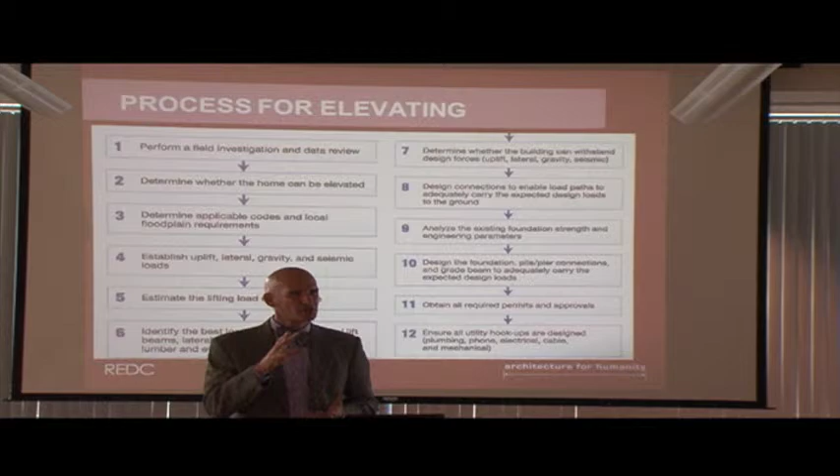So enough to get a reasonably good-sized passenger vehicle underneath the house, and then one to two stories, really depending on the garage, how high it is to that. Four on twelve pitch roof, three on twelve pitch roof.

Does Seaside Heights have a requirement for the roof pitch? Okay, nope, that's fine, some towns do. Yeah, I know, that's one check. Yeah, no, right, we're simple. Don't lock it up either.

Just some diagrams on considerations of elevation. Obviously, height, access. Just to jump back on height for a second, there are two heights in Seaside Heights that you need to be familiar with: 27 feet for residential, 40 feet for non-residential.

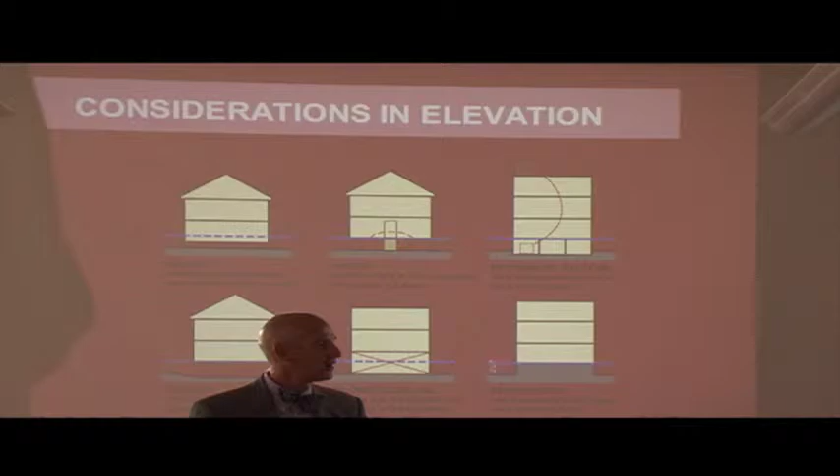Access: obviously, how do you get people up from grade to that first floor that's 8, 9 feet above grade? Stairs, probably. Ramp, very long ramp. A lift or a LULA, limited use, limited access elevator.

All ideas, right? Obviously, the mechanical systems, they're going to go north of the BFE. They're not going to be below unless they're in a commercial space and you do flood-proofing.

Parking below, well, you want to think about that a little bit. You don't want to make sure that the car is not going to float and bring the house up with it. So when that topic comes up, because I'm sure it will, we need to think about how we're going to approach that.

You could leave the car windows open and just let it, like a floodgate, and let the flood waters go. Why the heck not? Sure, no, that's a great idea.

That's great. And then ground floor use, again, we want to minimize ground floor use.

Before and after pictures, a pretty true-to-life diagram of a single-story bungalow in Seaside Heights before and after you elevate it. So in this particular case, there's a large stair in the front, but the building has been lifted up on piers probably and clad with some type of screen just to make it look a little bit nicer.

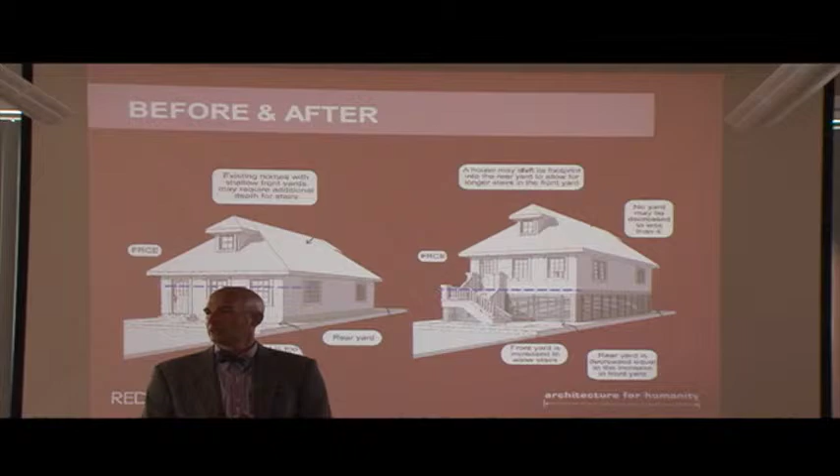Again, some before and after. In this particular case, they've abandoned the first floor and turned it into parking.

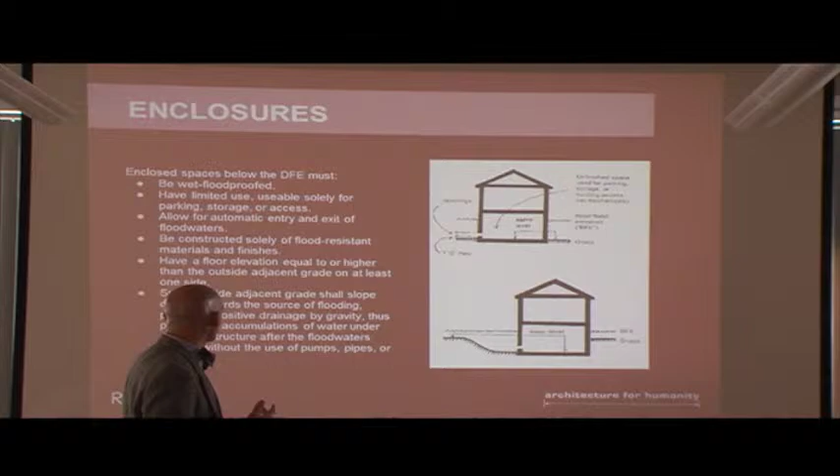Before and after for a two-story structure with and without the porch. Again, enclosures that are below the DFE must be wet flood-proofed, have limited use, useable for parking, storage or access, and automatic entry and exit of water.

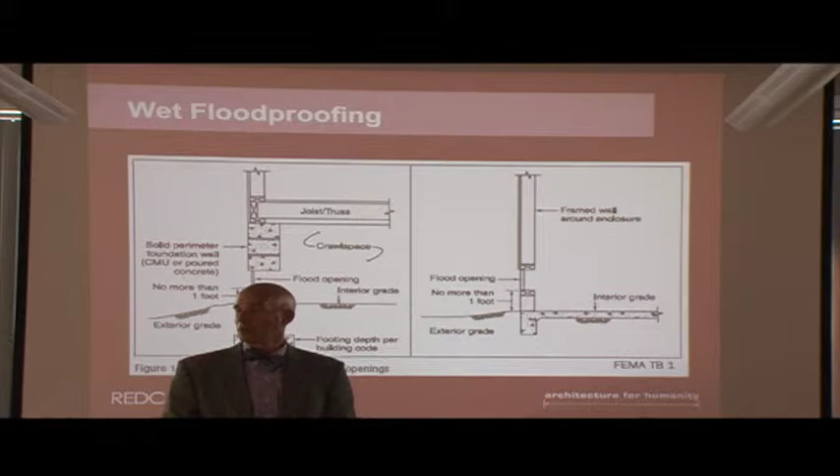Just a quick little architectural drawing of that, for those of you who can't get away from what a stud looks like, right?

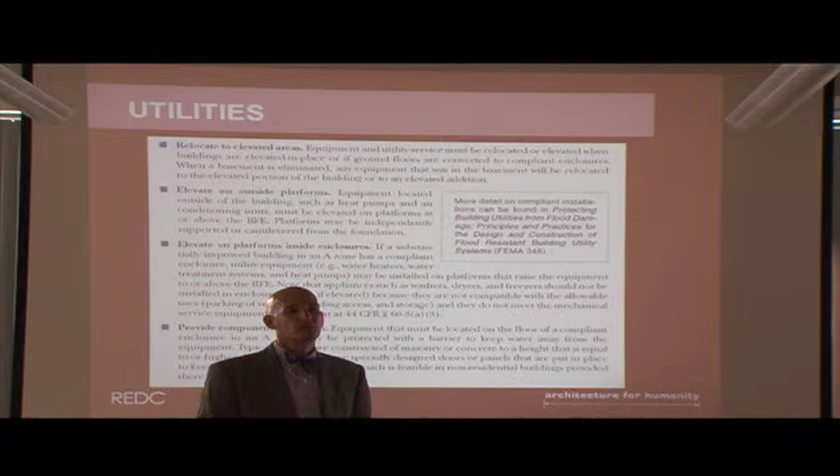Disconnect the meter and shut the power off to the building without waiting for the electric company to come and pull the wires. But the boiler or the water heater, that could be normal, it's just a disconnect.

So you want to be able to jump up. Someone short, you want to be jumping. Right, grab that meter, right? Grab that meter. Excellent.

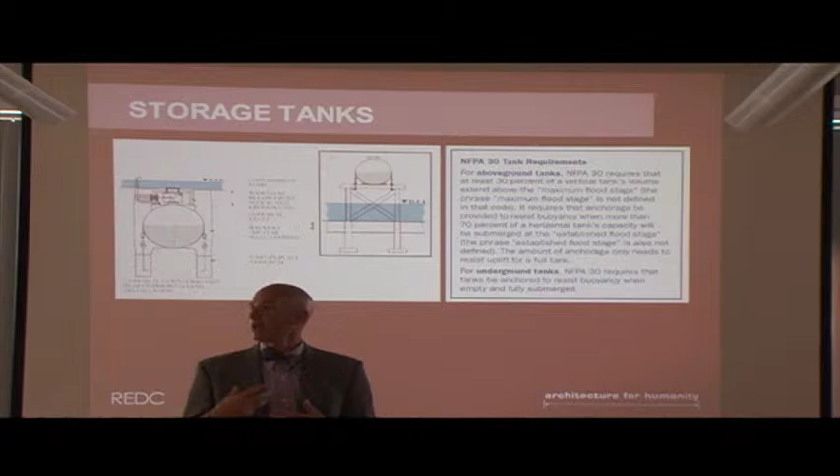Storage tanks, not too many of them. No, they're all gone. You had one. That's good. Well, but when we take this out of Seaside Heights, because I'm sure you're all going to want to do this over and over again with us, which would be great, there will be storage tanks, whether it's a water storage tank or a fuel oil storage tank. This slide gives you some direction on how to deal with that.

Not too many cesspools, although I would imagine there are some septic systems in the more rural areas that could be affected. Ducts and water heaters, again, design flood elevation.

And then emergency power, which building systems require it. I'm sure you're going to get some clients that say, where do I put my generator? I would treat it very much like a piece of mechanical equipment.

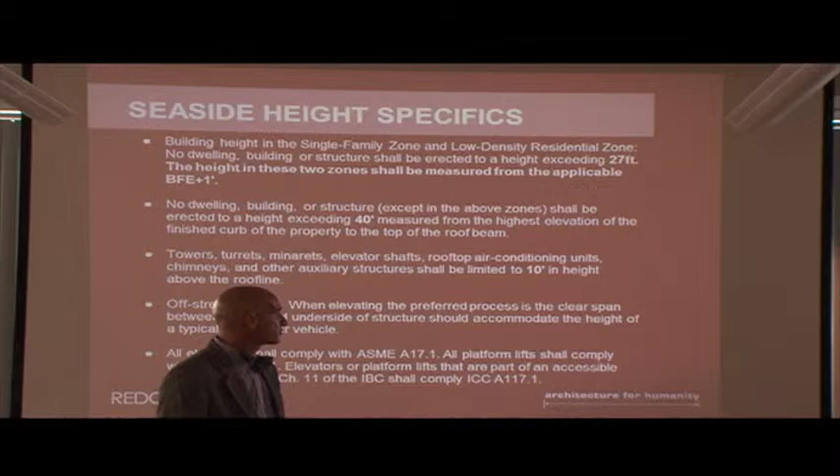So just some specifics for the borough. As we've been talking about, LDRs are 27 feet for buildings higher than shall exceed 40 feet. The borough is trying to encourage off-street parking as much as we can, which would certainly help when the building is elevated. Is there a curb cut? I would imagine there's a curb cut requirement. The application, they go up there, yeah.

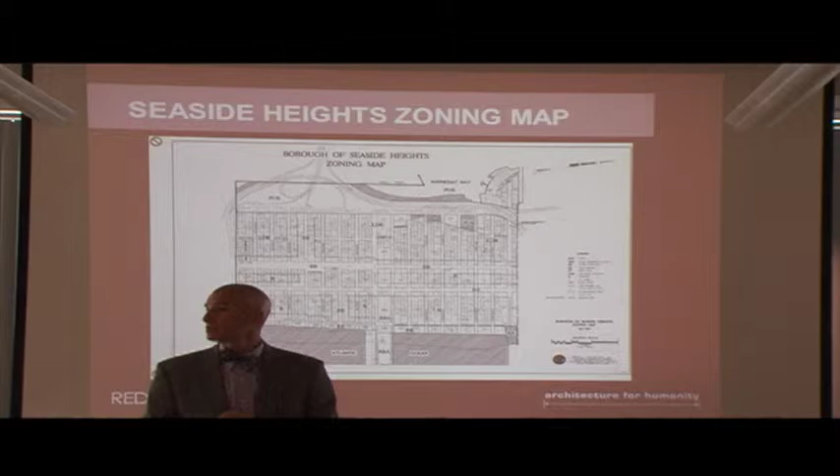Any more questions? I have something I'd like to add. Sure. So just stepping back to that Seaside Heights specific slide, one thing you are going to encounter are outdoor showers. It's a beach community. Outdoor showers, correct me if I'm wrong, but I believe outdoor showers, as long as they don't have hot water, they can stay below the BFE.

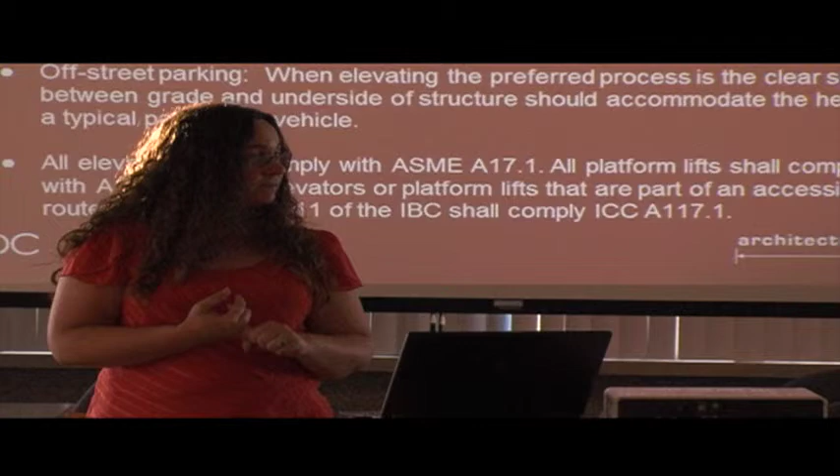The minute they add hot water, that's when you have to elevate that outdoor shower to above the BFE and DFE, like the habitable space. But if it's just a drain and it's cold water, you can keep it where it is, below the BFE. No, no, you don't get a drain if it's just cold water. Any drain has to be above the BFE. Okay.

What's the definition of hot water? If it's not the cold water side, it's hot water. Warm water is not allowed.

So we are looking to host the design clinic at the community center on Bay Boulevard. Friday the 18th, Saturday the 19th, Sunday the 20th. All 3 days will be from 10 a.m. to 6 p.m. We're hoping that we're going to have at least 50 people come through our doors, and we're going to divvy them up probably as equally as we possibly can.

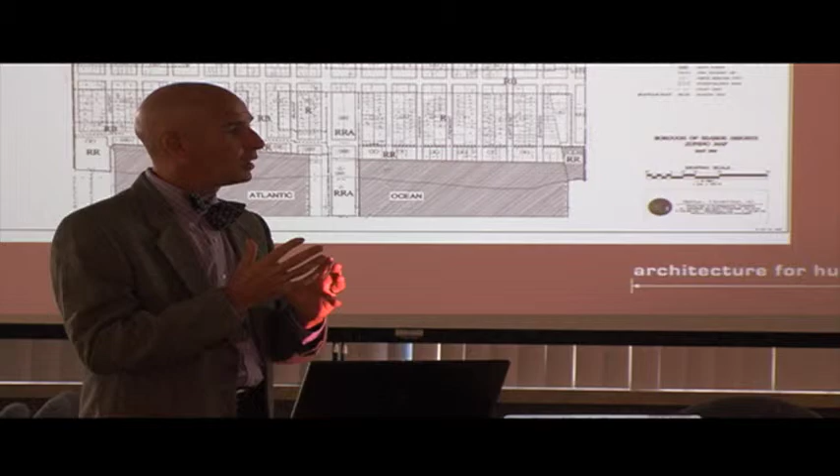And what you could do to help guide them to making that decision is just providing them with a sketch of what their house would look like if you were to put it up on piles, or if you were to put it up on 50% solid foundation, and give them the idea of, okay, if I do this, then this is sort of what the building is going to look like. We certainly wouldn't want to get into the fine-tooth comb for dollar value, but you can give a range. We did that with our clients in both Far Rockaway and Red Hook, the range of cost is X to Y, and we won't know what that is until we actually get into the fine level of design for your particular home.

And a lot of people haven't even gotten to that point yet, so just providing that level of information is going to be very valuable to them. Oh wow, my single-story bungalow looks like this when I elevate it and put in the lattice work and the stair or the elevator lift, because I'm getting a little bit long in the tooth and I plan on dying here and bequeathing this to my grandkids, and now they can live here for the next 100 years.

Here are the solutions, so you're educating them, and that's going to go a long way. It's going to get them from being stuck to being unstuck and coming up with a really great idea of how I'm going to live in my home for the next 30 years and beyond. And unfortunately, looking at it, there's a possibility that you can do this and build.